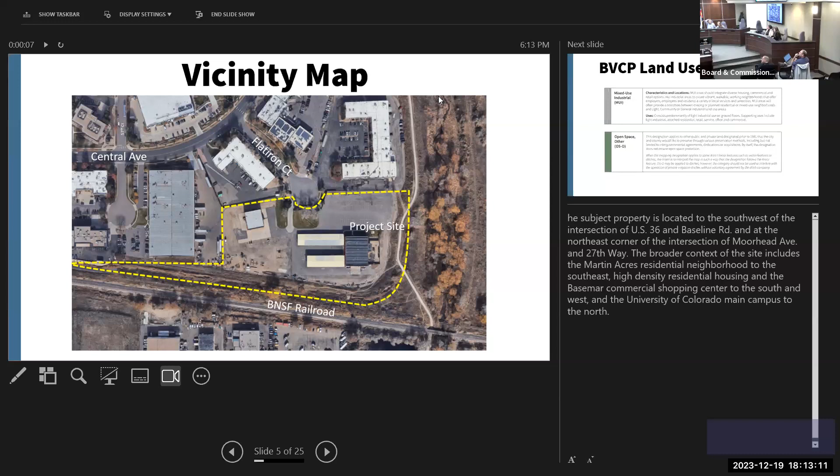Hold on. Is it still showing the notes? Is it good? Okay, hold on. Hang tight, everyone. Okay, I think that's where I was. Okay.

Okay, the subject site is located at the end of South Flatiron Court, just south of Central Ave and north of the railroad. And the proposed application will include the property addressed at 1855 South Flatiron, as well as two outlots that are to the west and covered by flood and drainage easements. And the entire site is indicated here in yellow with the two outlots, kind of that little tail to the left.

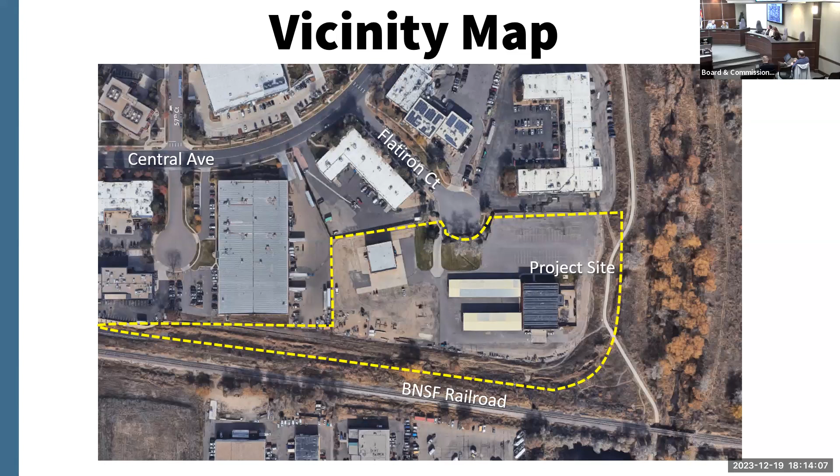The majority of the site is designated as mixed-use industrial, which includes light industrial uses as well as retail, office, and commercial uses. Mixed-use industrial zones encourage vibrant, walkable, and working neighborhoods, as well as amenities and services to nearby residents and employees. And then a small portion of the site, just to the east in the southeast corner, is designated as OS-O, and those areas are protected by easements.

The site is zoned industrial general and is surrounded by other IG zones, as well as the South Boulder Creek, which is zoned public there on the east. Intensity standards for the zone are based on a combination of the following: an FAR limitation of 0.5 to 1, the provision of a minimum of 20% of usable open space for the site due to the proposed height, and the application of height and setback standards. Per table 7.1 of the land use code, industrial buildings are limited to 3 stories and a maximum height of 40 feet by right.

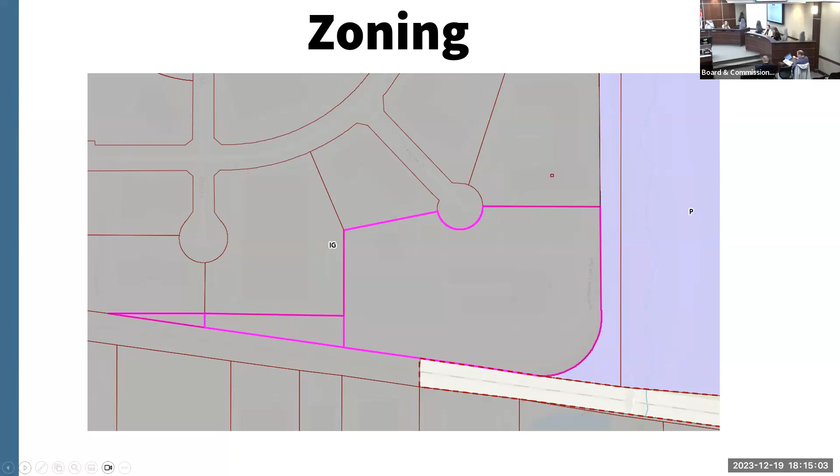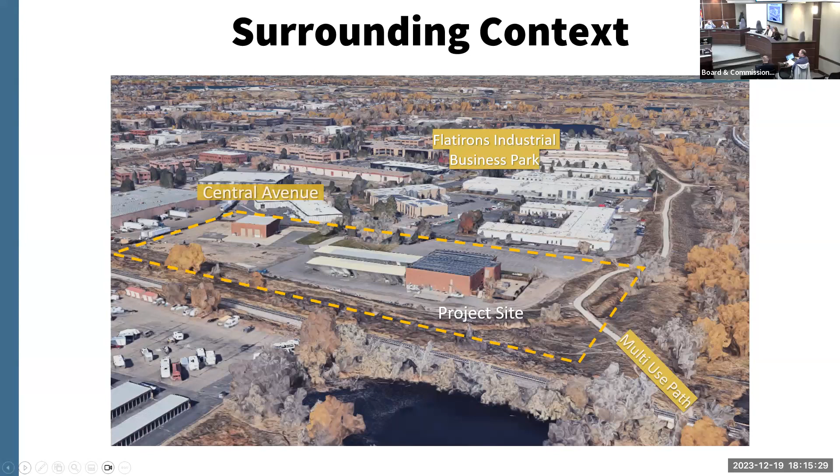The site is located within the Flatirons Industrial Business Park in East Boulder and is surrounded by a hub of industrial and commercial uses, including technical offices, biosciences, manufacturing uses, and local Boulder businesses like Upslope Brewing and Chocolate Love. And just to the east is OSMP property containing the South Boulder Creek and the adjacent multi-use path. Due to its location, the site is also subject to the East Boulder Sub-Community Plan.

And just here another view. The railway runs adjacent to the site and separates it from Arapahoe and other commercial and industrial uses along Arapahoe as well as the Arapahoe and 55th Street Station. And the broader context of the surrounding uses includes the Flatirons Golf Course, the Valmont Lake and Hillcrest reservoirs, as well as mixed density residential.

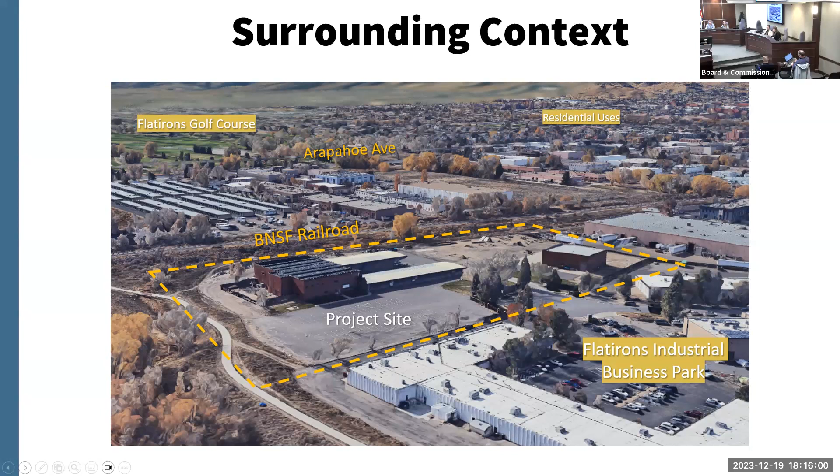The site is currently occupied by the offices for Lumen, which was previously CenturyLink, and the existing site consists of a larger brick structure, covered parking, and some accessory structures. Currently, the site is mostly surface parking with some asphalt, and lacks vegetation and mature trees.

Due to the proximity to the South Boulder Creek and Dry Creek Ditch number 2, which is further west, the site contains high functioning wetlands along the southern and eastern property line, and the site is also impacted by the 100-year, 500-year, high hazard and conveyance flood zones.

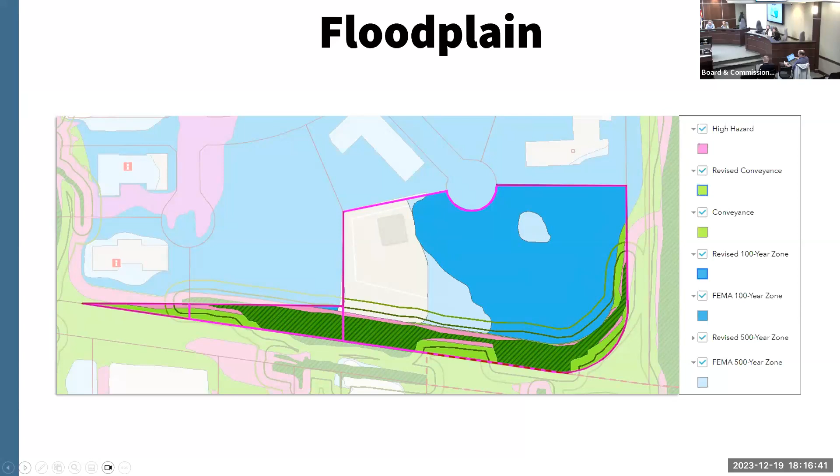So the proposal being discussed tonight is for two 3-story buildings that will function as research and development uses. The two main buildings, buildings A and B, are situated closer to the public realm along the northern and western edges, with a detached parking structure proposed for the southeast corner. And then there's some additional surface parking throughout the site, primarily by building A and building B.

Primary site access is from South Flatiron Court, with access points from the multi-use path just crossing the eastern portion. And then there's a fire and service access road that surrounds the perimeter. It's kind of hard to see in the picture, but there is no proposed development within the outlots or the functioning wetlands. And then last, a 9% parking reduction is being requested as part of this proposal.

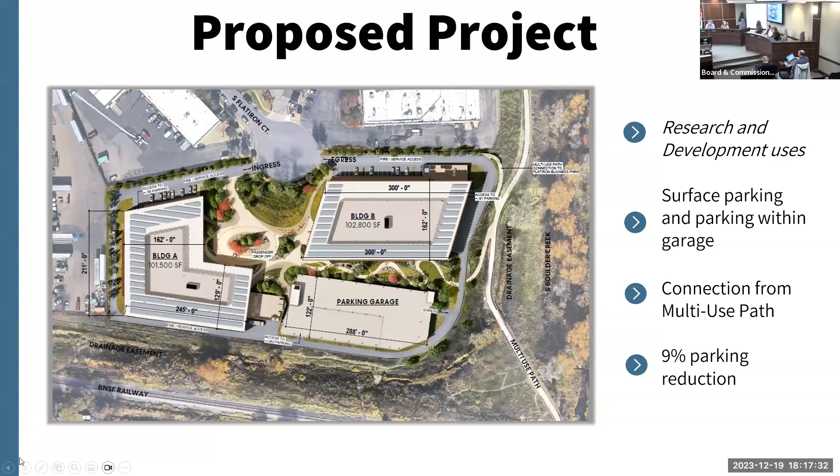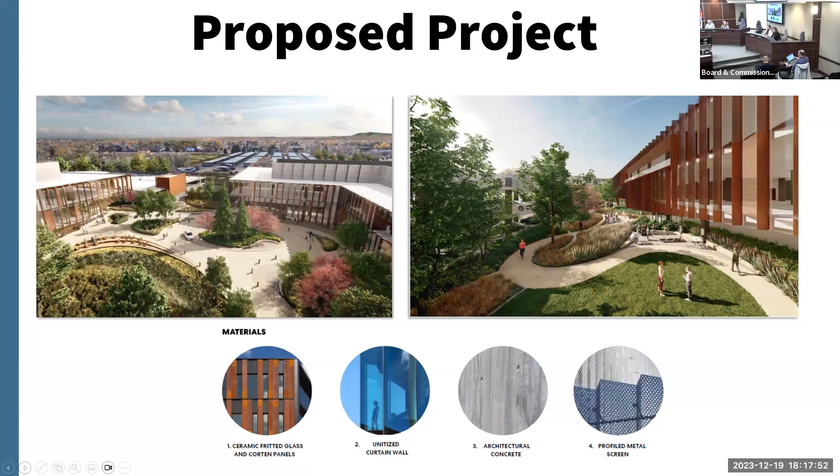The architecture of the project is contemporary and building materials include steel, concrete, and profiled metal. There is a significant amount of glazing and transparency in the building design. And the spaces between the buildings contain pedestrian walkways and greenery to create a courtyard that encloses on-site amenity spaces and counts towards the site's open space requirements.

The proposal is largely 3-story flat roof buildings with some mechanical screening on the roof. And those buildings exceed the by-right height for industrial zones. The project appears to meet FAR requirements and proposes about 207,000 square feet, which is less than the maximum of 215,000 square feet. But detailed floor plans will be provided as part of the site review application so that staff can confirm FAR calculations.

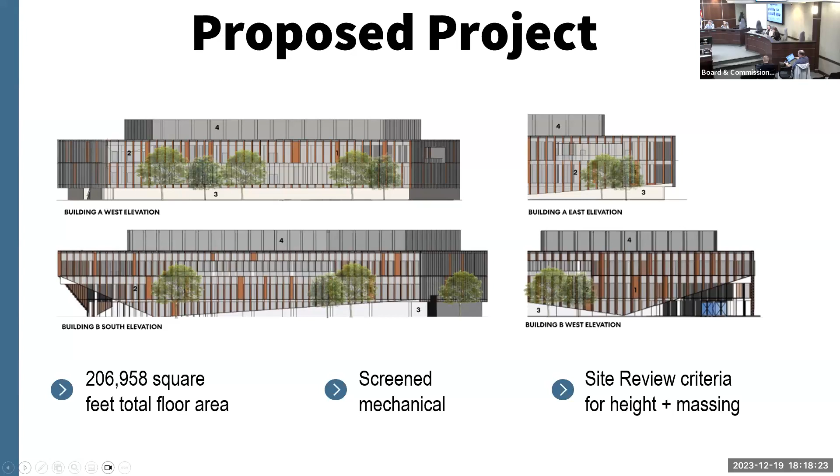The proposal includes two modifications to the land use code. One is a 9% parking reduction to allow for 468 spaces where 517 are required. This would typically be an administrative review and approval, but can be reviewed as part of the site review application. And the second is a height modification to allow development over the by-right height.

So building A is proposed to be 45 feet and meets the conditional height criteria for an additional 5 feet of height. And then building B is located within the floodplain and is proposing a height of 50 feet to meet the required flood protection elevation. And the proposal will be subject to additional criteria for building form and massing for buildings that are over that conditional height, as well as site design at time of site review.

Staff has identified three key issues for discussion, and I'll go through those one by one in the following slides. Key issue 1: is the proposal consistent with policies of the BVCP and the vision for the area as shown in the East Boulder Sub-Community Plan? And staff finds that overall the proposed use and design for the site aligns with key BVCP policies and the MUI designation. Some of the policies I included on the slide, but they are also included in the memo.

And as stated earlier, the site is also subject to the East Boulder Sub-Community Plan, which envisions mixed-use development with residential while also encouraging the preservation of industrial uses. This area is also specifically called out as an area of change to be designed as a walkable hub for workers and nearby residents. And further, the area is designated as a destination workplace place type, which calls for ground floor activation and improved access and mobility to encourage walkability and access for all users.

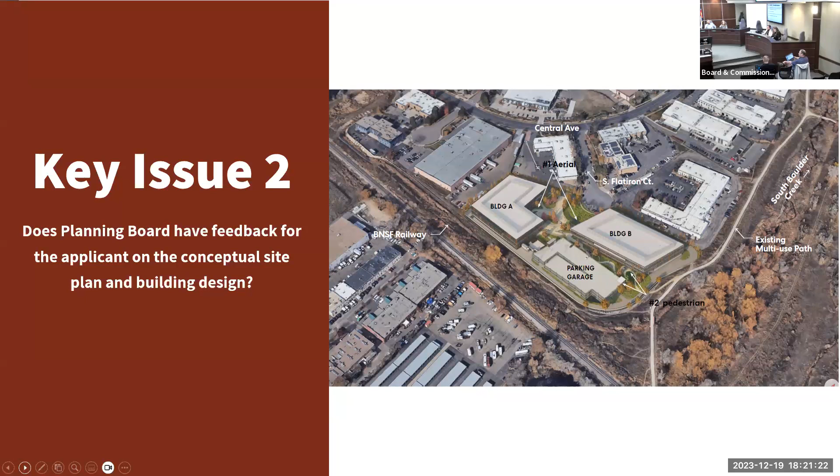Key issue 2: does Planning Board have feedback for the applicant on the conceptual site plan and building design? Staff finds that the general layout of buildings and amenities is appropriate for the site. Specifically, the parking is screened behind buildings A and B from the public realm. Staff also finds that the proposed materials are a good starting point and that the buildings are scaled appropriately to the area. And further, the architecture conveys a modern office and lab space. Generally, more information will be necessary to review open space design and operating characteristics, building massing, and circulation at time of site review.

Like I'd said in the previous slide, some further consideration should be given to the circulation patterns throughout the site for pedestrians, vehicles, and users of the multi-use path. And then the final key issue is just the opportunity for Planning Board to highlight or raise any key issues that they would like to discuss and share with the applicant.

For next steps after the hearing tonight, City Council has 30 days to call up the item for council hearing to provide additional feedback. After that, the applicant can either proceed with submitting a site review application or submit a second concept review application. And last, because the site review application would include a height modification, the approval will be made by Planning Board and subject to call up by City Council. And that's it. Leave it open for questions on the presentation.

Great, thank you very much. Let's start down here. Do you have any questions? I do. Sorry, I'm just pulling up my notes here. I just have a couple of questions for staff. One was about the materials. So by the way, thank you. That was an excellent presentation, very thorough, gave us everything we needed, I thought.

So just a quick overview of the agenda today. We've set up this evening to be an efficient and compact presentation that touches on the 3 main topics as shown. So first we'll start with a little bit of an introduction. This is Biomed's first time standing in front of Planning Board as part of this concept review process, so we just want you to learn a little bit more about who we are.

Secondly, we'll move into context for 1855. We'd like to go over Boulder plans and policies and the site location within Flatiron Park, building on what Allison mentioned earlier, that ultimately provided the framework for our design on this project. And then lastly, we'll get further in depth on the concept plan, and we'll provide additional commentary on our intent for the future of this site.

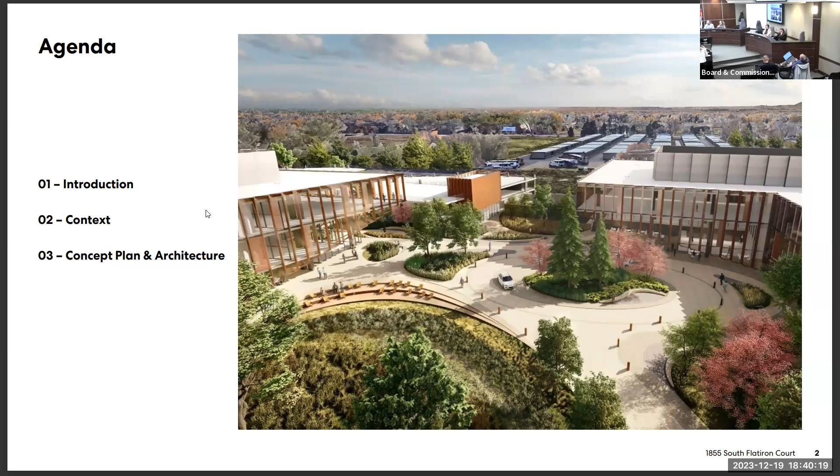Next slide, please. So a little bit on Biomed. Biomed Realty develops, owns, and operates Class A life science and technology real estate. We're working hard to meet the growing demand of this industry and provide real estate solutions that allow our tenants to perform innovative research. We're excited about the depth and strength of the talent here in Boulder, and we're looking forward to supporting the continued growing ecosystem here. Next slide, please.

Biomed Realty exists to support the advancing frontiers of human health. Our tenants are doing remarkable work every single day to advance the next generations of therapies, drugs, technologies, and vaccines. This includes treatments for infectious diseases, antiviral drugs for COVID-19, and oncology, to name a few. Next slide, please.

This slide showcases a selection of Biomed's amazing campuses to give you a flavor of our world. A few points to preview here as it relates to what we do and our vision here in Boulder and for 1855. One, we're successful in providing lab and research facilities in our markets with beautiful real estate. Each project varies in terms of scale, size, look, and feel, but ultimately they are crafted to respond to local context, local site conditions, and local needs of our customers.

Secondly, we pride ourselves on high sustainability standards and our goals to be energy efficient and green. LEED is a focus for us that we commit to very early in the design stages of these projects, and we meet or oftentimes exceed code requirements. You'll hear more on these themes later in the presentation that Ryan will give as it relates to 1855 more specifically. Next slide, please.

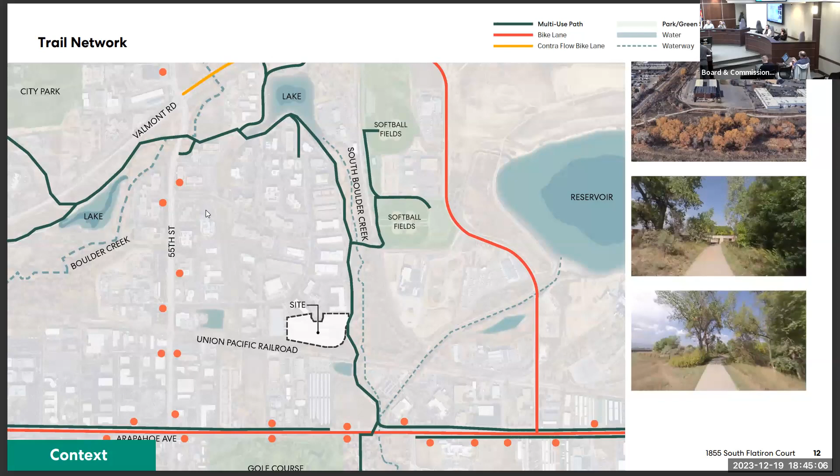Also, as we should have mentioned earlier, not only is there the local amenities, which are very close to us, but just within 2 buildings of us is a new kind of hub for the district neighborhood, which is being proposed by Biomed for recreation, kind of entertainment, as well as dining options. Next slide. So in looking more closely at the concept plan, you can see, next slide. Sorry. Our plan for this.

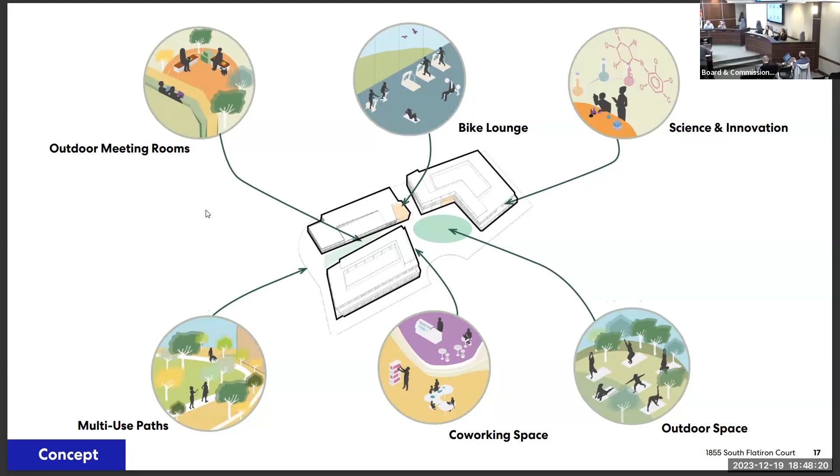Sustainability is important to us and to our client. Our client started at 500 Kendall Street back in 2006 with a LEED Platinum project. We ourselves started to work with them in 2011 for a LEED Platinum core and shell design for Illumina in San Diego. So we have a history of working together to deliver high performance buildings.

Some of the things you can see here are ideas that we're starting to embed into the planning here. The two concentric rings outline the base building blocks in the inner ring, and then where we started really thinking about those active features being amenitized throughout the campus. What we'd like to do, and there'll be a lot of evolution of this as we continue to pursue sustainable aspects of the project, is look at the strategies holistically, that they work together, work with the design. We don't like to look at the scorecard and do just point by point. We like to think of total systems when we design the project.

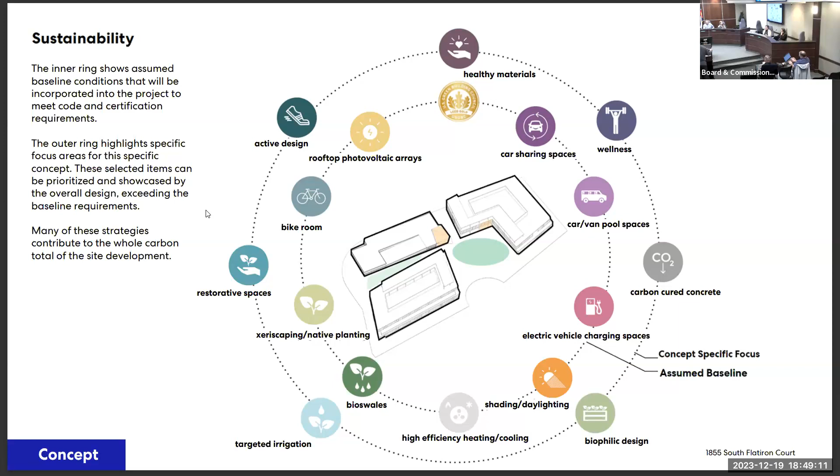Next slide. As mentioned earlier, for building sections, you can see that we are consistent with the stories in terms of the uses. You can see the two stories of research and then a story of parking below at the ground level. That's also shared with different kinds of amenities and uses on the ground plane. We are seeking the 40 feet with the 5 feet of conditional height. And for building B, which is in the floodplain, you can see that we're additionally looking at 5 feet of height in that location.

Part of that is also, when you look at it, and it's very hard to see here, there's a dashed line at the very bottom. Our lowest grade point, which is where you measure height, is anywhere from almost 2 feet 3 inches for building A to over 6 feet for building B. So the height is already shifted down. So that's part of the reason why we're looking at that. And I think there was also a question about the mechanical screen. So we would be consistent with the height, looking at the 16 foot as the maximum limit of the mechanical screen. Next slide.

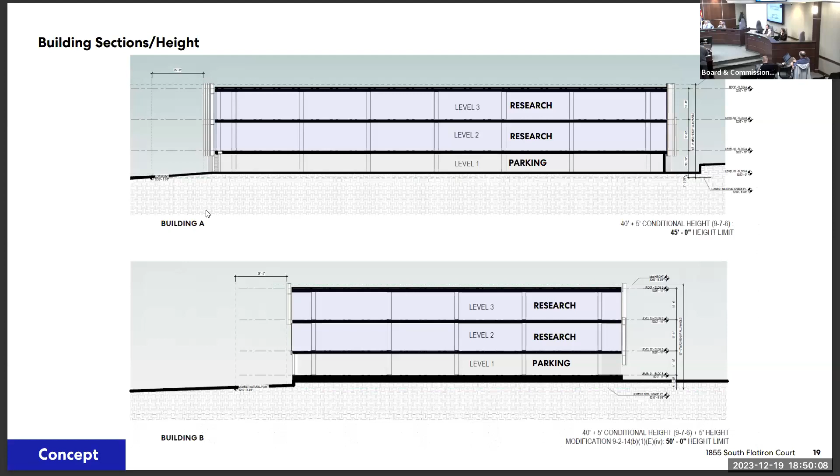The architectural character for this, we are looking at it, once again, reflecting the programmatic goals of the project. So on the upper elevations, those are conceptual elevations of the two buildings. We're looking at expressing the research functions over the podium piece. But as you can see, we're draping the form of the building down where we have the more public uses, those active ground plane areas at the lower level, at the entry points, lobbies, fitness centers.

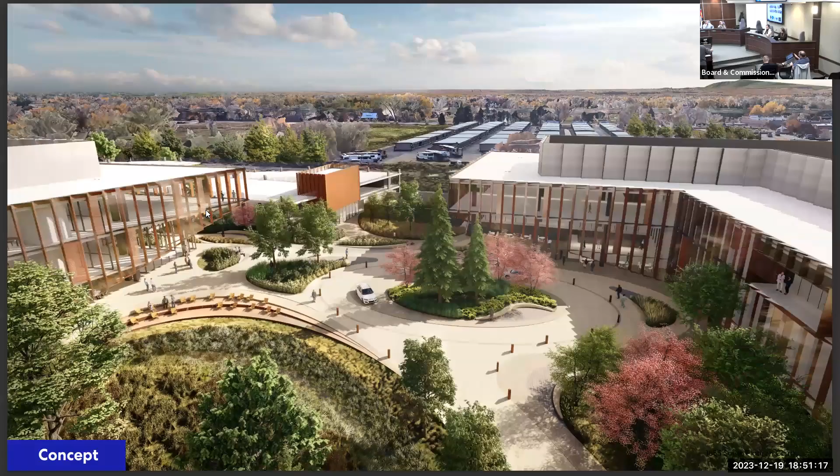We're also looking at a mixture of different materials, conceptually early on, use of ceramic frit, warm tones, looking at the local context of buildings, as well as the beautiful landscape these buildings will inhabit. The use of metal panels or the Corten panels. Typically, and to answer one of the questions, the Corten is a veneer that rusts, that preserves the core, so it stops the aging of the metal, but we usually use those only for landscape trim and elements. We use painted aluminum panels, high performance panels on the building proper, as well as crafted materials like architectural concrete, maybe board formed, to really show the character and craft and care with which the building is constructed. Next slide.

And then we just have a series of overall conceptual views of the project to give you an idea of the flavor of where we're developing the project to date. This is at that entry courtyard, so we're hovering above South Flatiron Court at this point, looking back at the project. You can see how we're really thinking of a mix of different uses, different types of spaces within this, from the rain gardens, bioswale to the amphitheater spaces, really creating places for people to be outside in this environment, as well as great visibility and connectivity, both to the amenities on site, as well as the Flatirons and the neighborhood beyond.

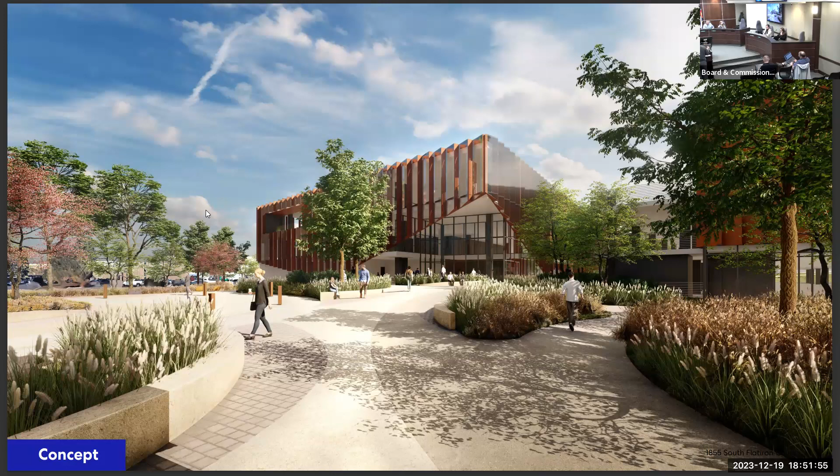Next slide. We've started to think about the building, really draping the building or lifting the skin of the building to expose those ground floor pieces. Here we're seeing the entry to building B, as well as shielding and hiding the parking structures with plantings, as well as architectural screening. Next slide. One of the advantages, as mentioned earlier, is by putting all the parking recessed under the building or the structure, we really are able to open the site. So here, the parking structure is to the left.

We have the architectural building, the facade for building B here, as you can see. We've thought about articulation of these buildings at a variety of scales, the draping of the kind of skin at those locations, looking at the kind of micro serrations and micro modulations to create a lot of scale and texture, once again, at a very conceptual level.

Slide. And lastly, wanted to bring it back to those three ideas that we really are thinking about these buildings, whether you're working at a lab bench, sitting in a meeting, inside or outside, that's about connectivity to nature. It's about the health and wellness of the community and the people who work here. So allowing them to engage and enjoy areas within the sun or under the cover of the buildings in the autumn and spring, or even as you start to traverse the stairs, which are expressed within the building, to actively engage within this. That's our last slide. Great, thank you very much.

I'm actually going to ask the first question, if y'all don't mind. It's a little unclear to me how cars get to the parking garage. And I kind of have the sense they go through what's meant to be all this pedestrian space. So could you just walk us through that? Sure. Yeah, we've intentionally actually separated it out.

If you go to the site plan, this is a real challenge because I like to point at things and I can't point. It's just a little delayed. Yeah, no worries.

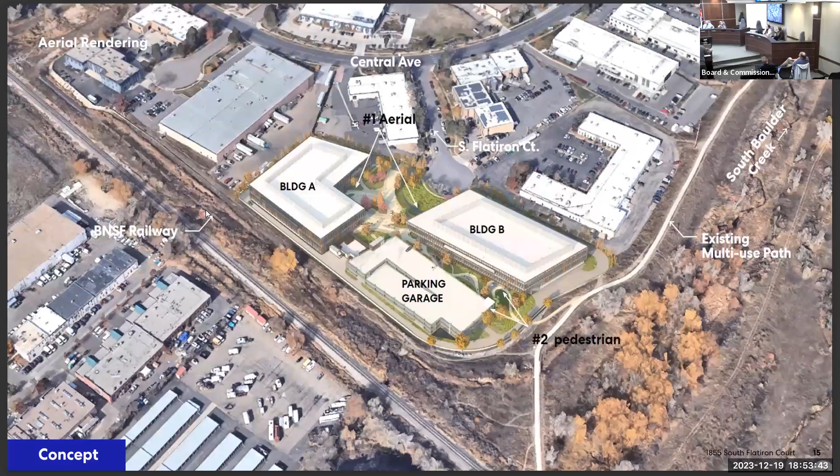Yeah, that's okay. So there's a point of ingress and egress off of South Flatiron Court. The cars will come in and we have them circulating around the perimeter of the site. So to get to the garage, no one drives through the courtyard with the exception of the drop off. So the drop off allows them to come in and come back to that drive. And then all the tendrils of space and those connections are completely outside of the circulation zone for cars. We're separating those. All right, thanks very much.

All right, I'll start down here with Kurt. And these should be questions and then we can have conversation amongst ourselves when it comes to our time to give comments. So just following up on Sarah's question. So for example, if you're parking underneath building B, you come in where it says ingress there and go all the way around. And then there's a big garage door on the east side. Correct. Okay.

And then another about vehicular circulation, you show sort of in the middle a traffic circle, and you showed cars on it. What is that then? Because I think that's maybe partly what Sarah was referring to. I thought that was supposed to be the pedestrian space, but then there are cars in there. We're mixing both and we've done that on a number of campuses. But what we're doing is, you mind if I go up and point at the board? Is that okay? I'm fine with it.

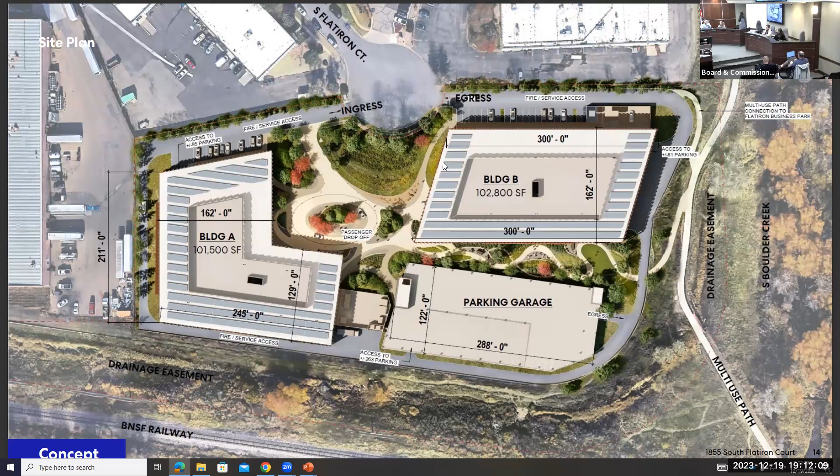Now it's time for public comment. Is there anyone here who has public comment about this project? Seeing no one. Amanda, is there anyone online? Yes, Vivian will help us with one person so far online. Yeah, so far, Lynn Siegel has her hand raised. So we'll start with Lynn. Lynn, you have 3 minutes. Please go ahead.

You were too fast for me. I was just going to take notes.

Number one, ground loop heat pumps. I didn't hear that for the heating and cooling of this space. And I say nothing should be built in Boulder further without ground loop heat pumps. I mean, you might have a lot of solar, but I don't know if you're using that solar for electric forms of heat, like air-to-air heat pumps, or I don't know how larger buildings are designed, but I didn't hear anything. If someone wants to mention that they did, then great, but that's my number one criteria for any large buildings is ground loop heat pumps.

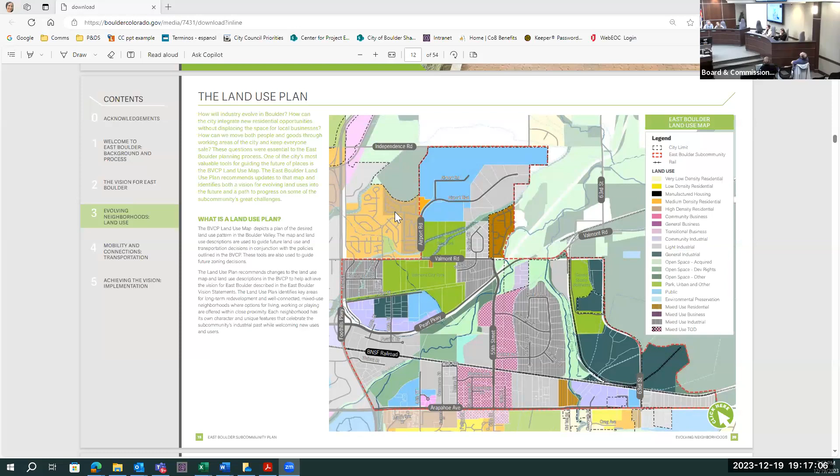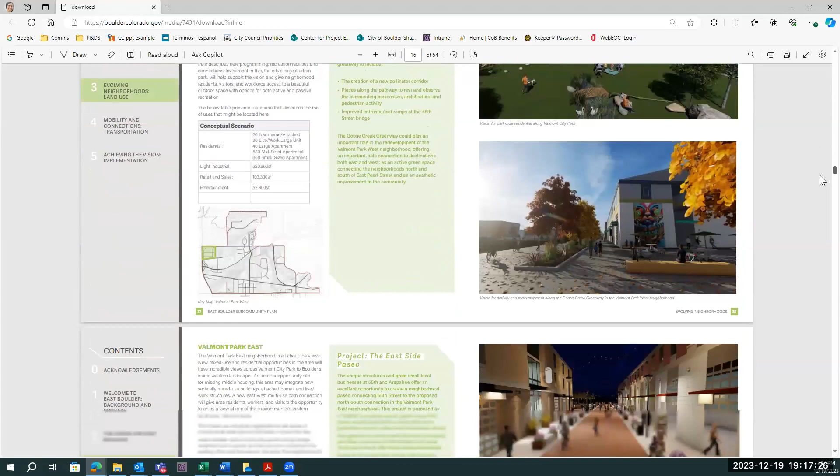Can you see it? That's the land use plan. And then the place types should be on page 20 of that document, I believe. She's not an expert, I just looked this up. I think it's going the other direction. So that's page 20. Maybe it's also a different page. It is a map, and there we go. That's it. So with the cartoon buildings at the bottom.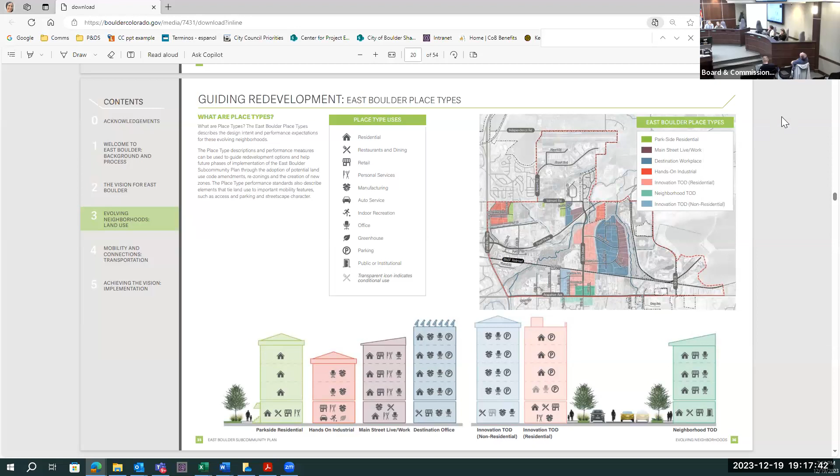Yeah. Okay. So I'm assuming the applicant is familiar with this. I'm seeing nods, so thank you. But I don't know if all my colleagues are familiar with this. So if we could zoom in a little bit on that map and the part that is the Flatirons Business Park, you can see in the deep blue, that is Destination Workplace. And in the purple, that is a place type called Main Street Live Work. And place types were kind of an innovation for this plan. We haven't used them in the city before. They've never been implemented into zoning. And I think staff are working on implementing these place types into zoning right now.

But all of these place types, the vision for this office park is that it would develop into something more residential than an office park, that it would not stay just industrial or just office buildings, but that it would become a neighborhood with residential, with personal services, with restaurants and cafes, and be more of a kind of place where people not just work, but also live.

And the property that you're looking at right now is in that lower southeast corner, and it is Destination Workplace. So it's definitely appropriate to have workplaces here. And I think staff had some comments about integrating a little bit more mixed use, like some cafes or some retail on the bottom floor. I think that's totally appropriate.

But the reason why that Main Street Live Work piece was put where it is is because it backs up to the creek path, right, to the amenity there. And so I think the southeast corner could also be appropriate for that if that's what you wanted, or if you have other buildings that are nearby.

But you've got, as you pointed out, some beautiful amenities here. You've got 2 breweries within walking distance, Wild Provisions and Upslope. You've got Ozo. You've got a deli right there. You've got a chocolate factory. Like, this is a place that a certain type of Boulder resident would love to live.

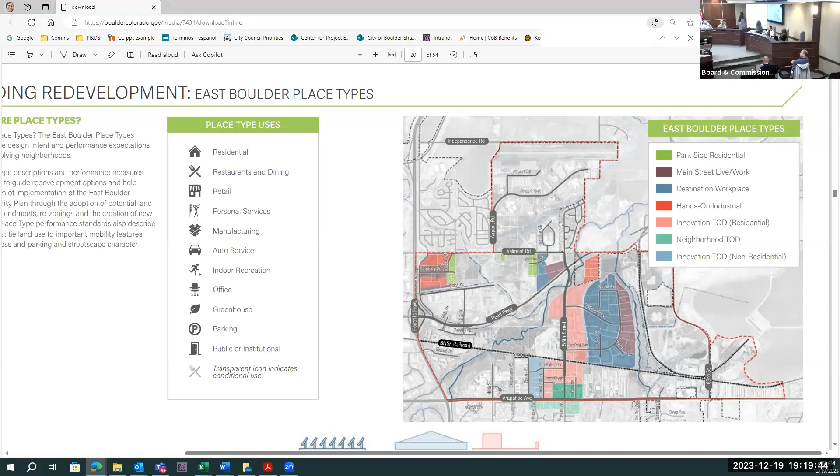I find that the concept plan is, for the most part, consistent with BVCP policies and consistent with the vision for the area as shown in the East Boulder Subcommunity Plan. I don't have a lot of input on our first key issue. I'll call on myself, and I would agree with Laura. I had much stronger language regarding residential than Laura, who was quite kind.

But I would like to point out both to the applicant and to the city, this is one of the challenges of creating multiple options rather than really encouraging housing in an area where we really need housing. I won't read what I wrote, but I will support what Laura said about encouraging you all to perhaps step away from your business model and perhaps work with some residential developers.

I appreciate staff's pointing out the need for street level activation, which is also key to the East Boulder Subcommunity Plan. Again, I won't read what I've written here. And I appreciate Allison's long list of Boulder Valley Comp Plan policies that are relevant to this proposal and want to highlight the ones that I'm most concerned about, presuming this comes back while I'm still on board.